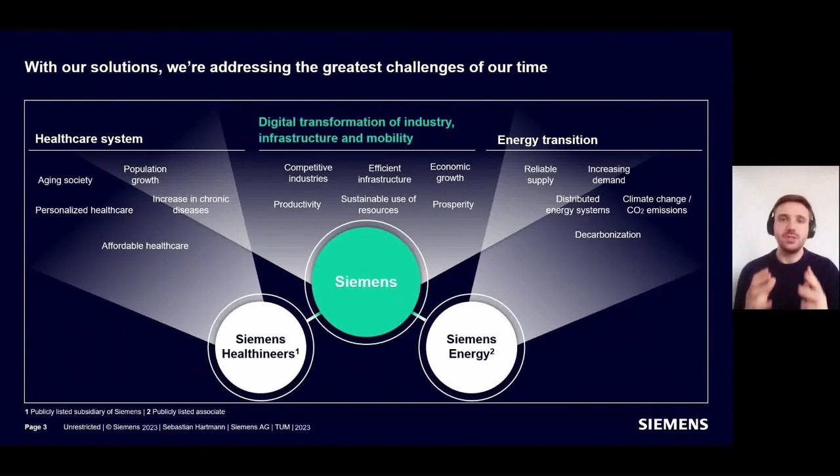And with our Siemens AG in the center, focusing on the digital transformation of industry, infrastructure, and mobility, we are able to address the greatest challenges of our time. Myself, I work at the Siemens AG in the business unit Digital Industries. So therefore, the digital transformation of industry is part of my day-to-day business.

For Siemens, one of the major aims, but also challenges, lies in the combination between its core business and the digital business. So Siemens came from being an electronics company. Where we grew a lot, where we were really good in the past and also right now, is in offering hardware solutions to automate machines, to automate processes. Over the past decade, the digital business of Siemens grew a lot. So this means, for example, our NX software solution, where you can design parts, simulate the parts, and so on, really took off a lot.

And the goal and strategy overall at Siemens is to combine the core business and the digital business to one mutually reinforcing ecosystem. So this means that we want our core business to benefit from the know-how we now have from our digital business. But on the other side, we of course also want our digital business to benefit from our know-how, our experiences in our core business. And with this intersection, we are able to offer a really unique value proposition to our customers.

If we take a look at what Siemens is doing in the AM business, the exact same constellation of real world and digital world comes into play again, because if you take a look at the portfolio that Siemens is offering in the additive manufacturing field, you will see, first of all, a lot of contents. But the most important one here is that Siemens is offering software solutions, so the digital world, and we are offering automation technology. This basically means our core business in the end.

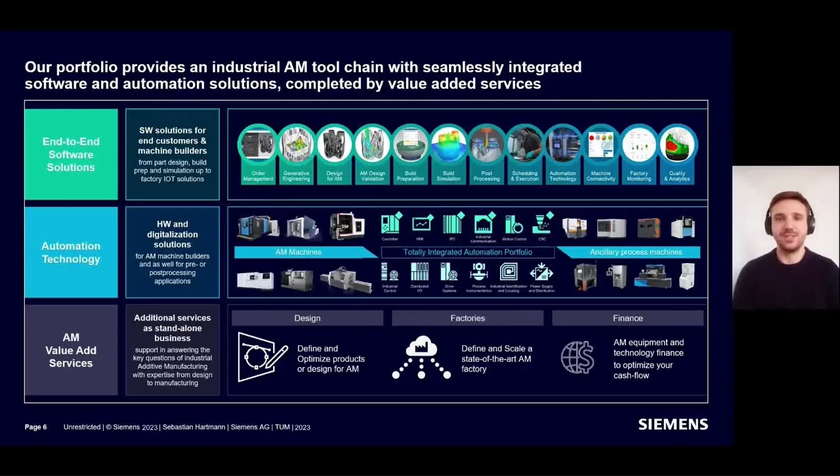So enough of the Siemens market show. Let's get a little bit more into the technology here, into additive manufacturing itself. For Siemens, it's all about bringing additive manufacturing to an industrial scale. And therefore, Siemens has identified 4 core technologies where this transition to industrial scale production has already taken place or will most likely take place in the future.

The first technology in this regard is the powder bed fusion technology. Here, it's all about one or multiple lasers selectively melting specific powder particles in the powder bed. And by applying powder bed layer on powder bed layer, you are able to build up parts with powder bed fusion. Here we work together with EOS and Trumpf.

The second technology is the so-called multi-jet fusion technology. Here it's not about a laser that melts or sinters specific powder particles, but here it is an inkjet agent that is dropped onto specific particles, specific points in the powder bed, and makes the particles stick together. And by this sticking process, you are able to build up parts in the polymer and also the metal sphere. Here we work together with the company HP.

For directed energy deposition, the third technology, quite a different technology, because here you actually have a printer head, a so-called nozzle, that is able to move around the part freely and deposits material layer on top of material layer. And hereby you're able to build up metal parts subsequently layer by layer. We worked here together with DMG Mori, with BeAM and other companies.

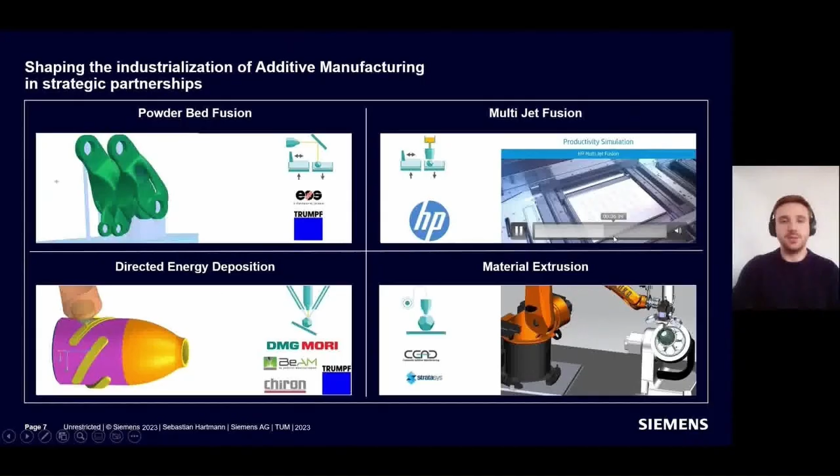My own PhD and also the rest of this talk is going to focus on the directed energy deposition category right here. Because to clarify this, directed energy deposition is a category where multiple technologies can be assigned to. The technology that we will focus on during the rest of the talk, and is also the subject of my PhD, is the so-called laser metal deposition technology.

The most important advantages of this technology are, first of all, it has high building rates, which means it is quite fast in production compared to, for example, the powder bed fusion technology. And it also enables you to produce multi-material parts. So this means during the production of one part, you can utilize multiple materials. So this is highly interesting for academia and business.

The main applications of directed energy deposition in general, but this is also valid when you just look at the laser metal deposition technology alone, are first of all prototyping and manufacturing. So this means, for example, in the aerospace sector, this technology is already heavily utilized. It's also very common to use laser metal deposition in repair and welding applications because you're able to build on existing parts. So if you have a part that is used up in a specific section, you're able to mill the section down and to build up this specific section using laser metal deposition again.

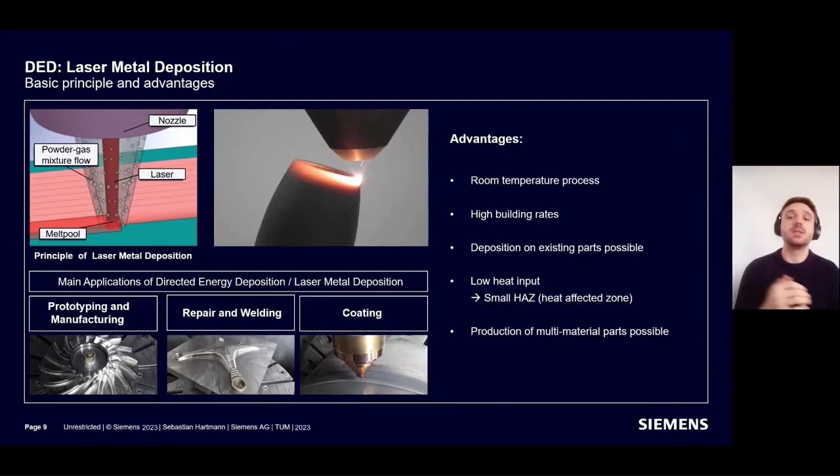What this rocket nozzle does is when basically a rocket launches into space and it wants to get off the ground, it of course has to burn a lot of fuel. And the result of this fuel burning are of course a lot of hot gases, and those hot gases have to be released into the atmosphere again. And this is exactly what this rocket nozzle here is for, because the gas is flowing out of this hole at the end of the rocket nozzle.

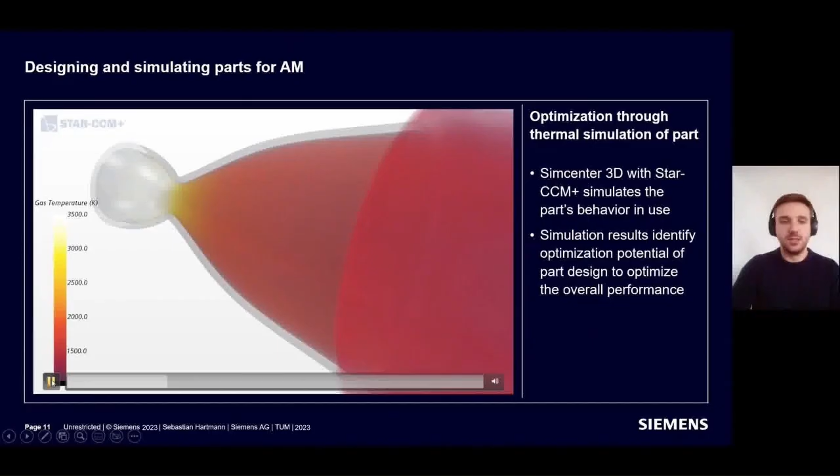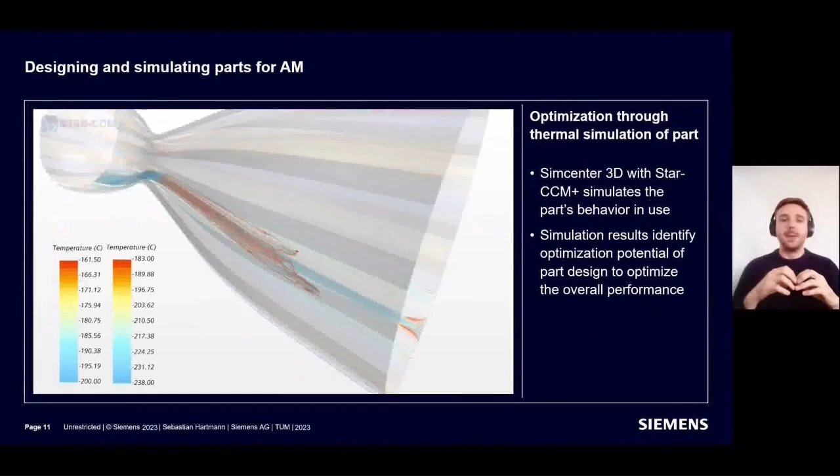The next step in the digital chain after the design was to simulate this design. So this means we utilized a specific software within Siemens NX, and we simulated what would happen temperature-wise during such a real takeoff of a rocket nozzle. So we let all of the hot gases flow through the rocket nozzle, and we took a dedicated look at this double wall structure. We were working with liquid oxygen and liquid methane at this point, and we took a look at which specific sections a critical amount of overheating would take place.

And as you can see right here, in the upper section of this part, there seems to be a problem with overheating, and also in the lower section, there seems to be a problem with overheating. We took the insights of these results and went back to the first step in the digital chain, to the initial CAD design of the part.

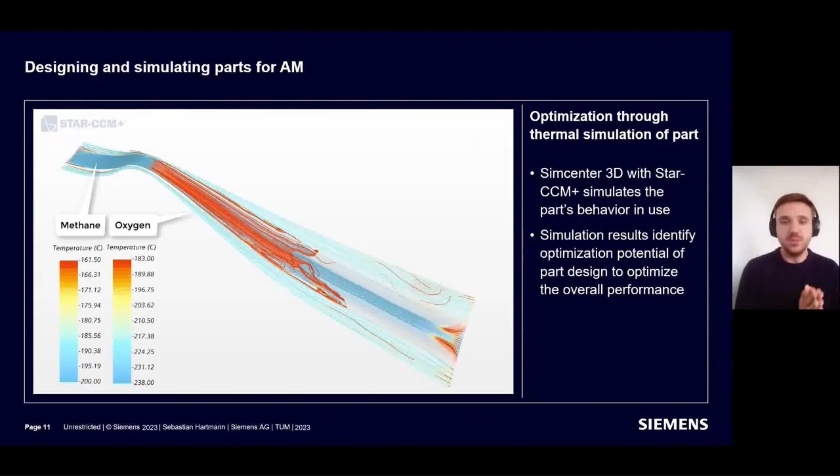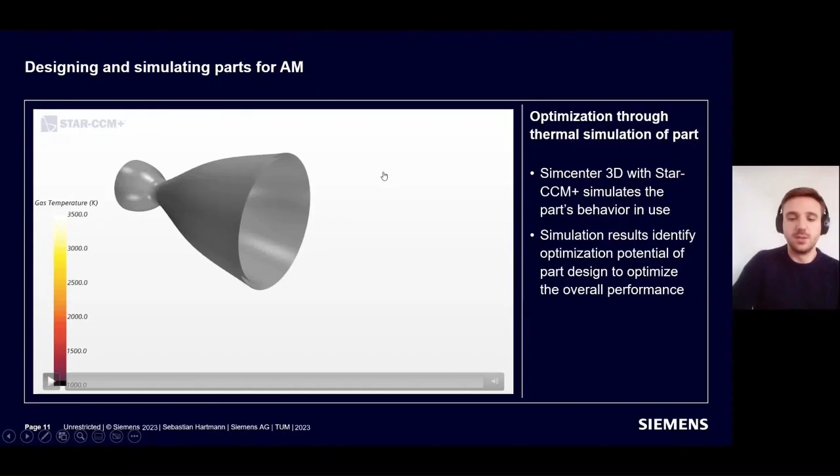You have a different design, you have multiple insert chambers, you also have a different design at the bottom of this part right here. And this is how you're able to move within the digital chain of additive manufacturing. You're also able to reiterate design based on the insights you gather, for example, from fluid simulations.

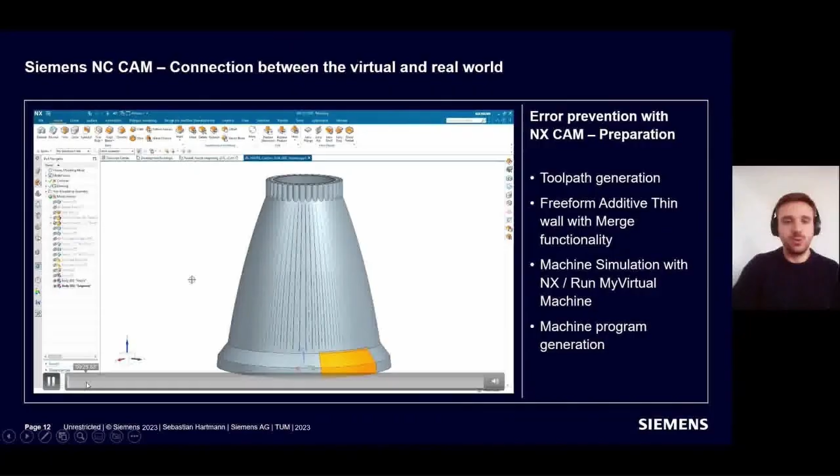The next step in the digital chain is you have the part design, it's now ready, and now you want to test how this design would be produced in your 3D printer. And for this, we are again in our Siemens NX software suite. And what we did for this use case, we did not want to print the whole part, which is also possible, but we just took a look at a specific section, the orange colored section at the bottom of the part. And what we did now was we imported this section into our machine.

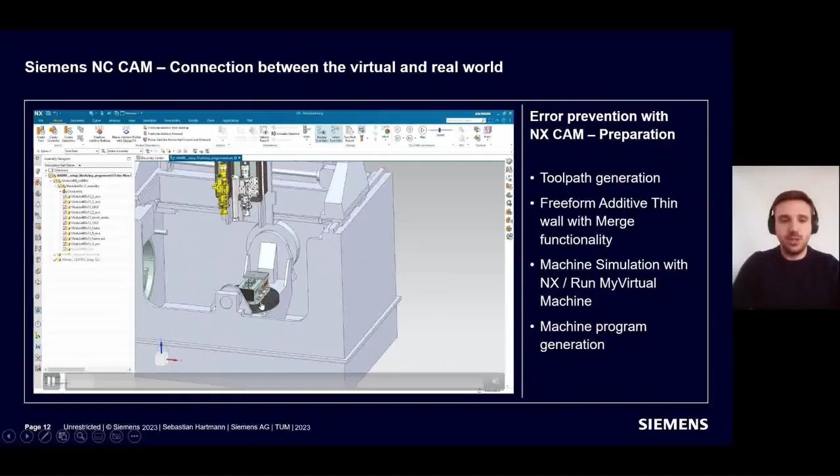So this is a machine from the company Beam. It's a French 3D printer OEM. We've imported, first of all, the design of the machine. We then also imported the design of our part into the building chamber. And then we take a look if this design is actually printable in the way we've pre-programmed it. So we are able to run the entire production process before the real process will ever take place.

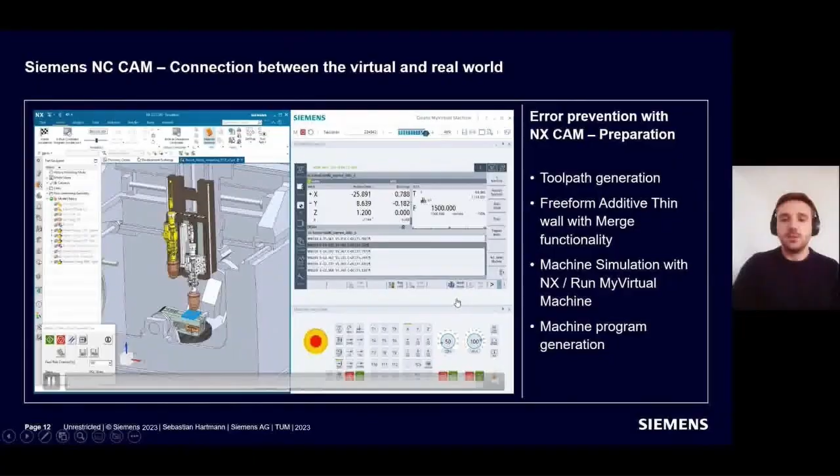So this is all happening in this digital chain because we know exactly what the design is like. We also know what kind of movements the machine has to go through during the production process. And by that, we are able to validate if the design of this part is actually producible without any errors in the real process in the end. And with those insights, after you completely simulated the walkthrough through this entire production process,